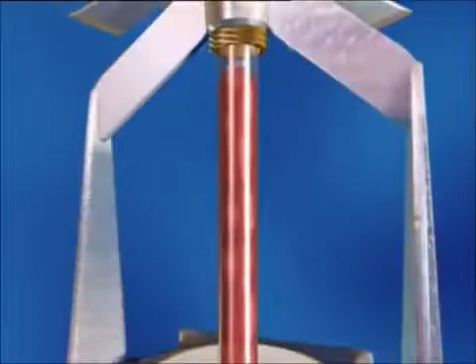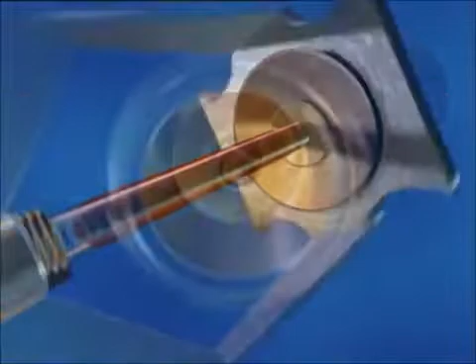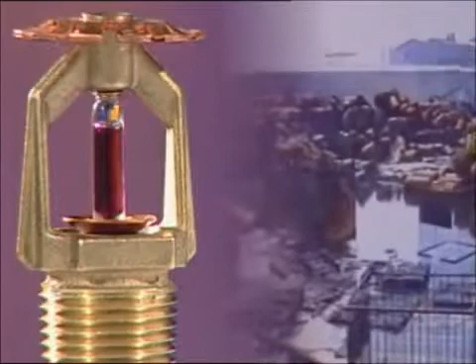Fire sprinkler systems were invented over 120 years ago. Since then, several hundred million sprinkler heads have been installed throughout the world. In that time, they've effectively protected thousands of buildings, helped to prevent the financial collapse of numerous businesses, saved countless lives, prevented innumerable burn injuries, and protected the environment from catastrophic fire-related pollution. They're universally acknowledged as the most effective first line of attack against fire.

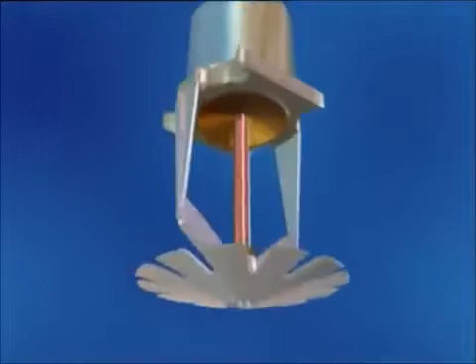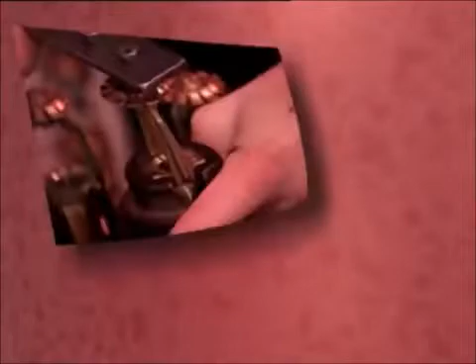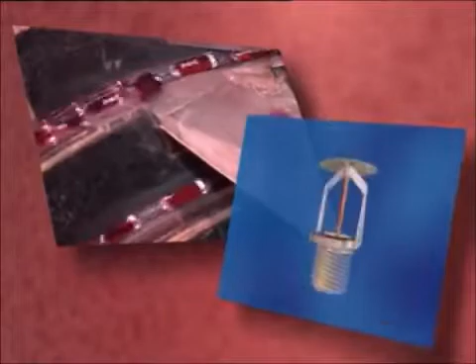The world's first rules for the design and installation of automatic fire sprinklers were written in the UK by John Wormald in 1885. Fire sprinkler systems in the UK are generally designed in accordance with British Standard 5306 Part 2 and, in some instances, Loss Prevention Council (LPC) rules for automatic sprinklers. American rules may sometimes be used, being Factory Mutual or National Fire Protection Association.

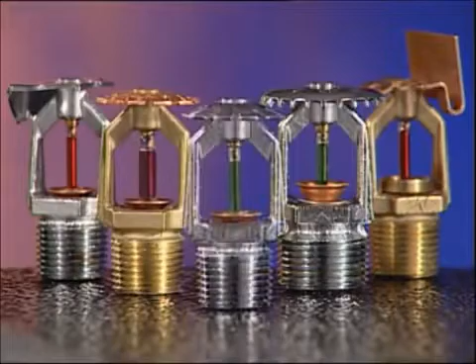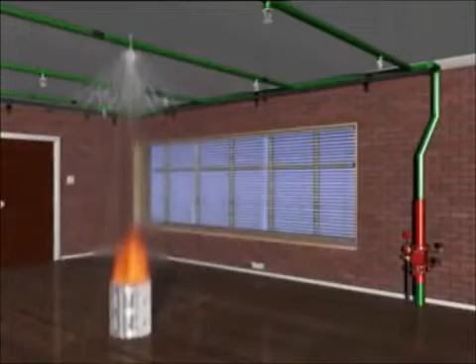Sprinklers are designed to cope with the fire risk presented by each individual building and may also be specifically configured to save lives. Water still remains the most effective firefighting medium available. Sprinklers will deliver water right into the heart of a fire during its early stages through a specially designed sprinkler head. Sprinkler heads are unique. They automatically detect a fire, discharge water right into the seat of the blaze, and operate a local alarm. They can also operate a remote alarm to alert the fire brigade or other emergency centre.

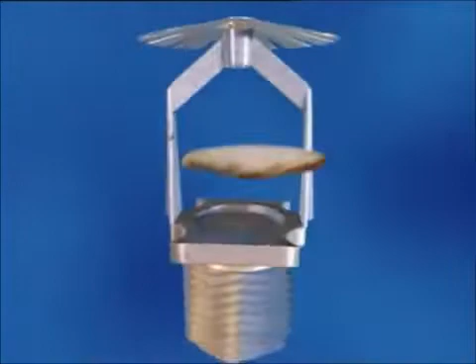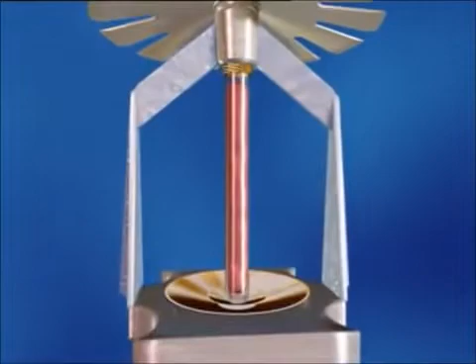A typical sprinkler head comprises a threaded body to connect to pipework, with a valve seal to hold back the water. The valve seal is retained by a glass bulb which contains a liquid that has a high coefficient of expansion. A small measured quantity of vapour remains trapped when the bulb is hermetically sealed. When the liquid expands under the influence of heat from a fire, pressure in the bulb rises until the vapour is compressed. Further increases in temperature cause a rapid build-up of pressure sufficient to shatter the bulb, releasing the valve seal and allowing the water to flow onto a water distribution deflector. This results in an even distribution of water droplets in a predetermined pattern over the fire.

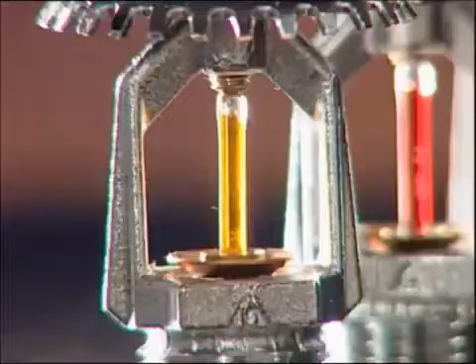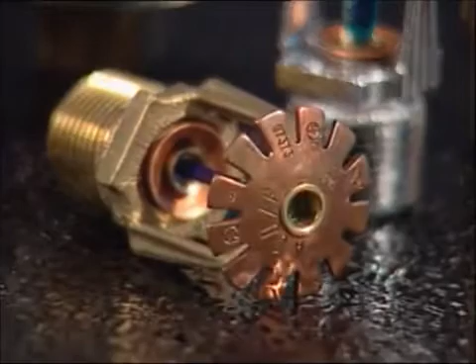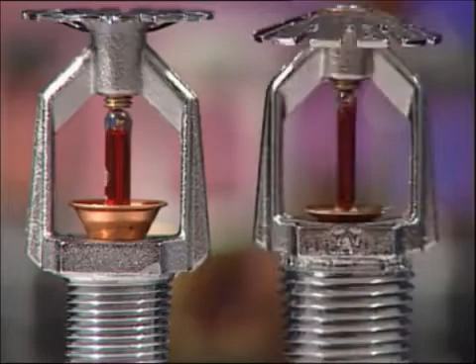Sprinkler heads are available in a variety of operating temperatures, which are identified by the colour of the bulb. The specifier has a vast array of sprinkler heads available to him. Each type of head is designed to cope with different fire risks, different operating temperatures, and different operational requirements. The British Standard defines fire risks as light hazard, ordinary hazard, or extra high hazard. Generally, as the hazard increases, so does the water discharge or density discharge.

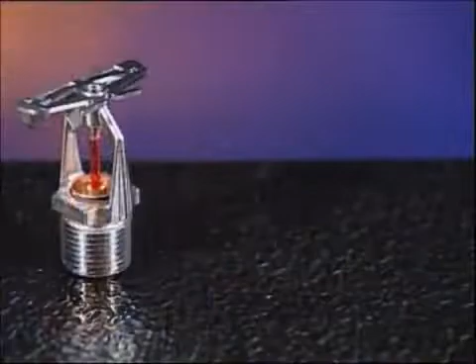Conventional sprinklers can be mounted in either the upright or pendant position, with a deflector designed to spray a proportion of the water discharged onto the surface of the ceiling. Spray sprinklers in upright or pendant positions are used for applications where all the water needs to be discharged downwards. Sidewall sprinklers are primarily used to keep ceilings clear of pipework for aesthetic reasons or to avoid having to disturb existing ceilings when installing. Each sprinkler protects up to 17 square meters in light hazard fire risks and 9 square meters in ordinary hazard fire risks.

Sidewall sprinklers with extended coverage are specifically designed to give an extended coverage of water distribution, with one sprinkler able to protect an area of up to 21 square meters. This type of sprinkler must have a quick response bulb. In a fire, few deaths result from direct contact with flames. The greatest threat comes from inhalation of the products of combustion, such as carbon monoxide, hydrogen cyanide, hydrogen chloride, other toxic gases, and the associated heat.

The reaction time of quick response sprinklers minimizes the life-threatening levels of toxic gases and temperatures. In many environments, there are people who cannot escape without assistance, such as in hospitals or homes for the elderly. Quick response sprinklers provide valuable time for those in charge to assist their escape.

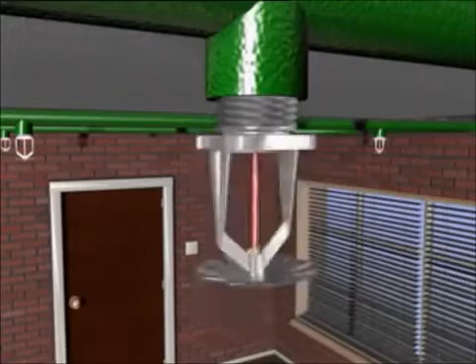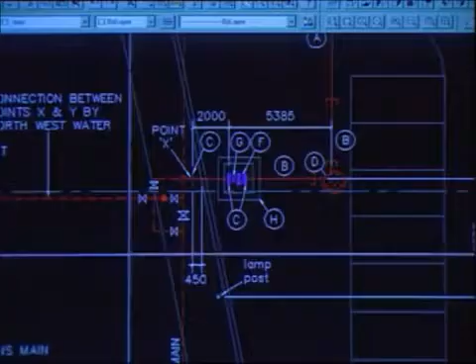A sprinkler head is connected to a water supply via a network of pipes fed throughout the building. The area protected by each sprinkler head can vary from 9 square meters to 21 square meters depending on the fire risk. The pipework is hydraulically designed to ensure the correct flow and pressure of water is maintained at each sprinkler head. The water supply to the system can be fed from the town main for light to medium fire risks, such as residential, offices, hotels, and light manufacturing and commercial occupancies. For high fire risk areas, such as heavy manufacturing and warehouse storage, a pumped supply from a water storage tank or reservoir is normally necessary.

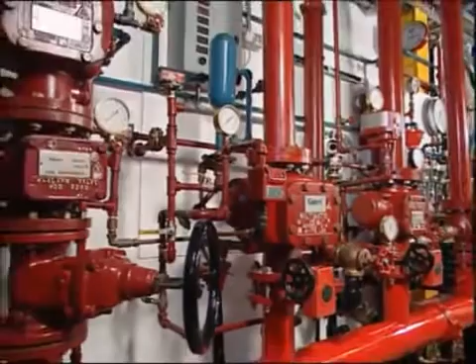The design requirements are specified in the British Standard BS 5306 Part 2 and LPC, FM or NFPA design rules. A control and alarm valve automatically delivers the flow of water to the sprinkler heads. There are generally 5 types of sprinkler system that all require different valve arrangements. A wet system is where the pipework is permanently charged with water and used to protect premises where temperatures are unlikely to fall below freezing point.

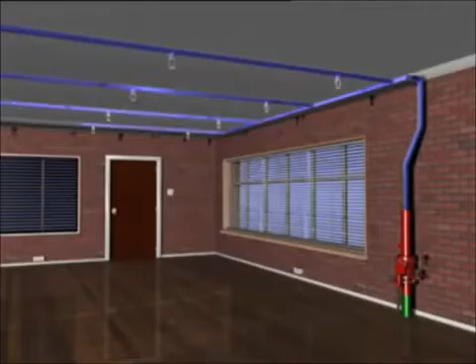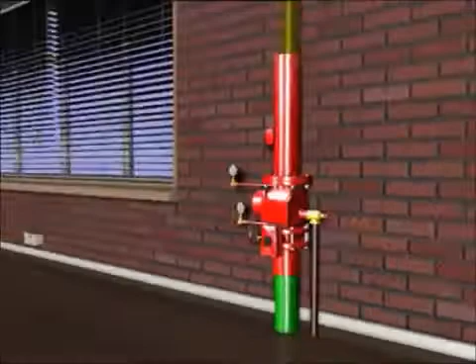Where the ambient temperature may fall or be below freezing point, the presence of static water in the sprinkler pipes is clearly undesirable. In this situation, a dry system can be installed in which the pipework is charged with compressed air. When a sprinkler operates, the compressed air is released and the control valve opens, allowing water to flow into the pipework and to discharge from the operated sprinkler heads.

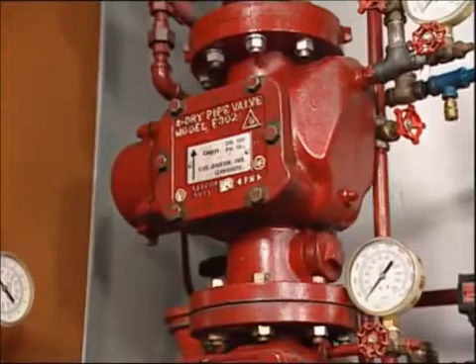An alternate wet and dry system, as the name implies, allows the system pipework to be alternately charged with water in summer and with air in winter, when there is a risk that the ambient room temperature can fall below freezing.

Pre-action systems are comprised of a standard sprinkler system and an independent electrical system of heat or smoke detectors installed in the same areas as the sprinklers. On receipt of a signal from 2 or more detectors, the main control panel automatically opens the control valve, allowing water to flow into the sprinkler pipework. Water is only discharged when the individual sprinkler heads reach their operating temperature.

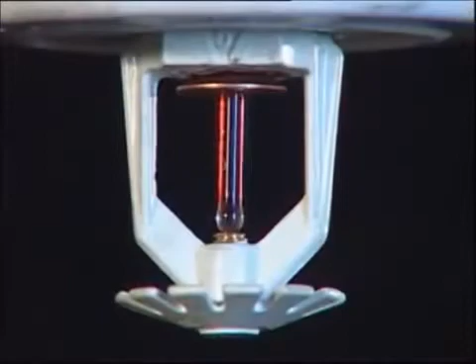Any physical damage to a sprinkler in a non-fire situation will not result in water discharge, but will cause both visual and audible alarms to be raised at the main control panel only.

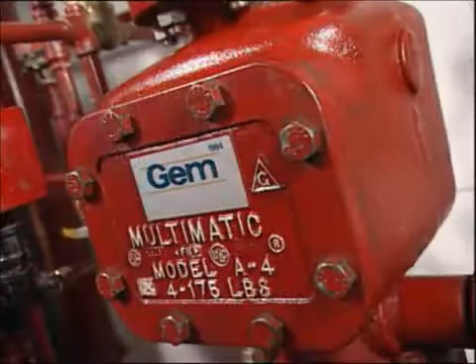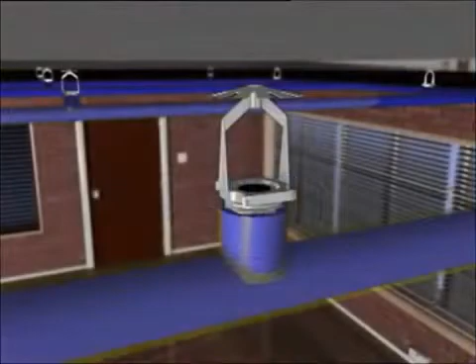A deluge system, unlike any other typical sprinkler system, is designed specifically for high-hazard applications with fast fire growth potential. The deluge valve is actuated by a separate detection system responding to a fire. This brings a large number of open sprinklers into action simultaneously throughout the protected area.

The successful performance of sprinkler systems has been detailed in records from across the world, paying testament to their outstanding reliability and effectiveness. In Australia and New Zealand, where it's a requirement that all fires must be reported, records reveal that over a 100-year period, sprinklers successfully controlled 99.5% of fires in sprinklered premises. Statistics collated in Europe over the last decade are remarkably similar, showing that in fully sprinklered premises, 99% of all fires have been controlled by the sprinkler system.

The reason sprinklers are so effective is because they attack the seat of the fire before it has time to grow and spread. There's no excessive use of water. In Germany, for example, 86% of fires in sprinklered locations have been controlled by 5 or fewer heads. In the UK, it's reported that of the fires in sprinkler-protected buildings over a 10-year period, almost half were controlled by 1 or 2 sprinkler heads only.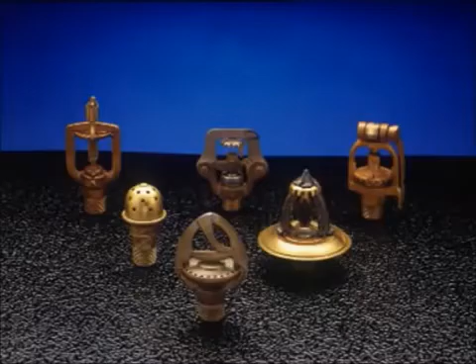Fire brigades, local government authorities and politicians alike have all seized upon these statistics. This has generated numerous campaigns for sprinklers to be installed in applications that could only ever have been dreamt about when sprinklers were first commercially launched over 120 years ago. That's because sprinklers are unique. They not only detect a fire and raise an alarm, they operate to control it and in many cases extinguish the fire before the arrival of the fire brigade. Only the sprinkler heads closest to the fire operate.

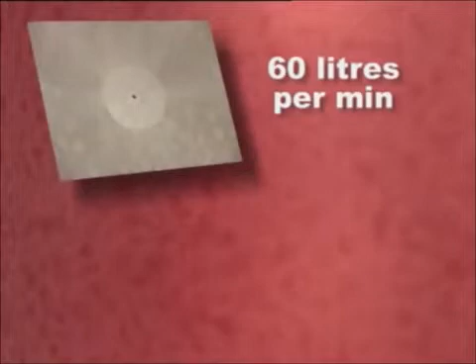Water is discharged by a sprinkler directly onto a fire at a rate of a minimum of 60 litres per minute, in comparison with an unsprinklered building where the fire brigade using only 1 fire hose could discharge 500 litres per minute. The fire will also be much larger as it will have grown for at least 10 minutes before the fire brigade arrive, so the likelihood is that more than one hose would be used.

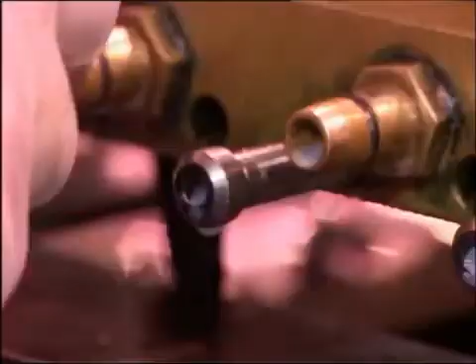Worldwide research shows that of the 40 million sprinklers installed every year, only 2 may operate accidentally. This is because every head is individually tested before leaving the manufacturer. Sprinklers are economical to install. For example, in the case of office blocks and hotels, the sprinkler system would cost about the same to install as a quality carpet for the equivalent area. Sprinkler systems will have a lifespan of at least 25 years, probably 50 years. Some systems are still in use today that are over 120 years old.

The threat from fire will never change. It will always be with us, endangering life, property, and the environment we live in. Fire sprinklers will protect us and future generations. Fire sprinklers. Protection for life.